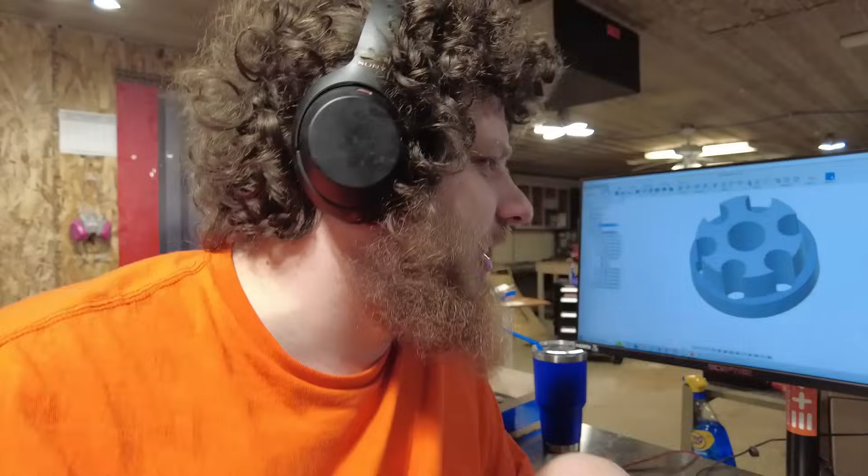The part is actually pretty simple as long as we can make it without breaking these tiny drills. Now, unfortunately, I can't show you this part, but what I did is the same thing I did last time. I designed a part that kind of looks like the part, but is completely different in all aspects and features, with the exception of the hole sizes on this one. So I'll be able to show you making this part, which I'll use as kind of a setup part.

As long as we can get the holes drilled, the rest of it will be easy. So the setup part will help me get there. But I get to show you the whole process this way instead of having to blur the picture of the part or something lame like that.

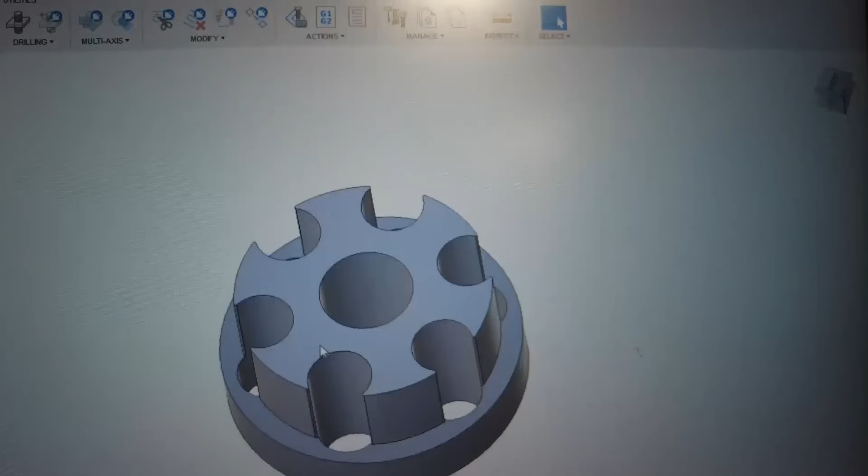Speaking of which, this is our part. Now, there are a bunch of holes that I'm drilling. I'm drilling 0.2 millimeter holes and then 0.3 millimeter holes.

We have this nice little step here, and I have conveniently made the outside diameter 1 millimeter and the height of this 0.5 millimeter. The actual part is just slightly bigger than that, but for dialing in tool wear offsets to get the diameter and height dead nuts, it's easier to do it with round numbers. So for a setup part, I might as well use the round numbers.

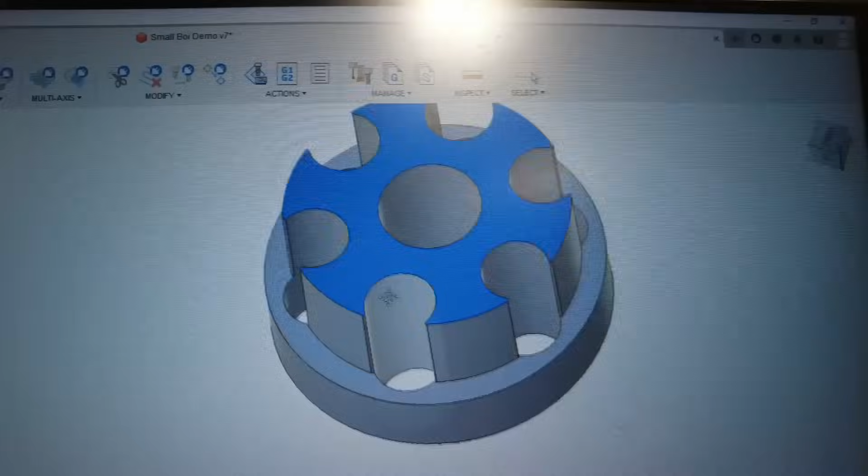This will be a one operation part. We're going to start by facing off the whole stick of material and then spot drilling our holes. Then we will be drilling our holes, first the 0.2 millimeter, then the 0.3 millimeter.

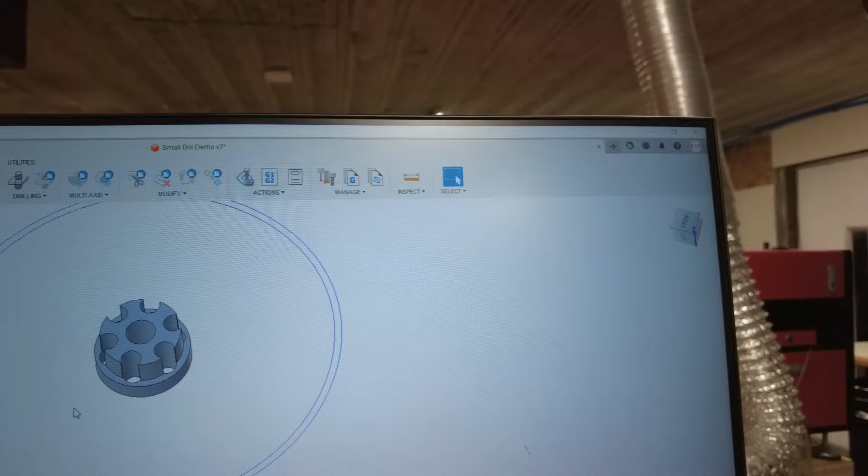Then we'll be doing some adaptive clearing with a 1/8 inch end mill, and then profiling the top ring here, and then profiling the bottom ring. Lastly, we will be using a slitting saw to part this off. We'll tab it off, and then I will just use some sandpaper to get rid of the tab on the bottom.

We do have some tight tolerances we need to hold on this. The outside diameter is plus or minus 1 thou, in addition to the height and that little step height. So definitely the kind of part you want to be making at 2 a.m., which is, I have a feeling, how this project is going to end.

In the last video, we made my smallest ever part, and then immediately made a new part that was my smallest ever part. This part will again be my smallest ever part. So I have 3 parts in a row running that have set records for my smallest part.

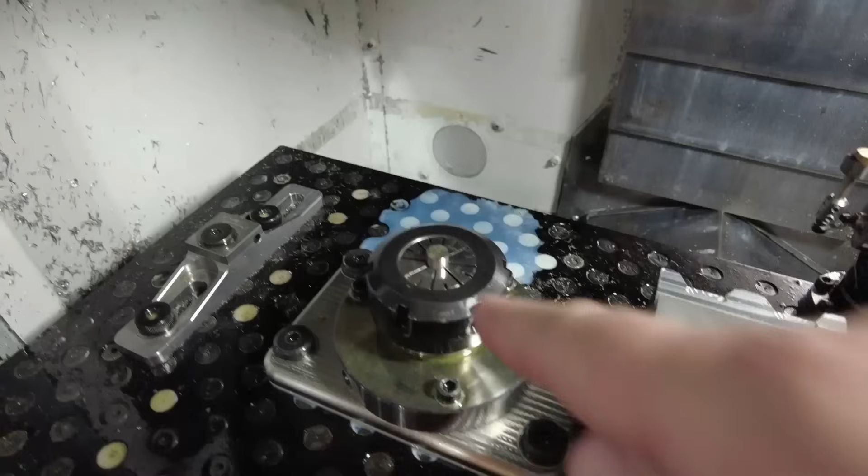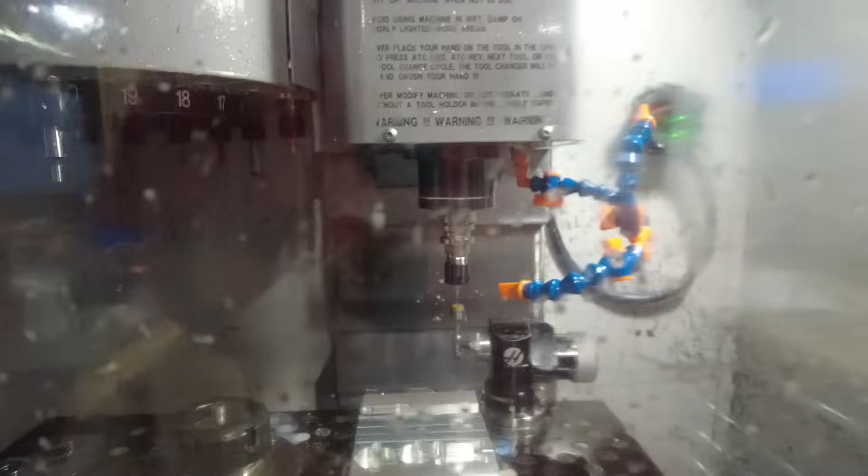Now, out of sheer luck, we get to use the same setup and even the same material as those last parts. So all I have to do is move this up and reset my work coordinate system. I only needed to set the 2 drill bits to be able to run this part. Everything else uses core tools, which is convenient.

And we're pretty much ready to press cycle start. I have a feeling this is either going to be a very short project or a very long one.

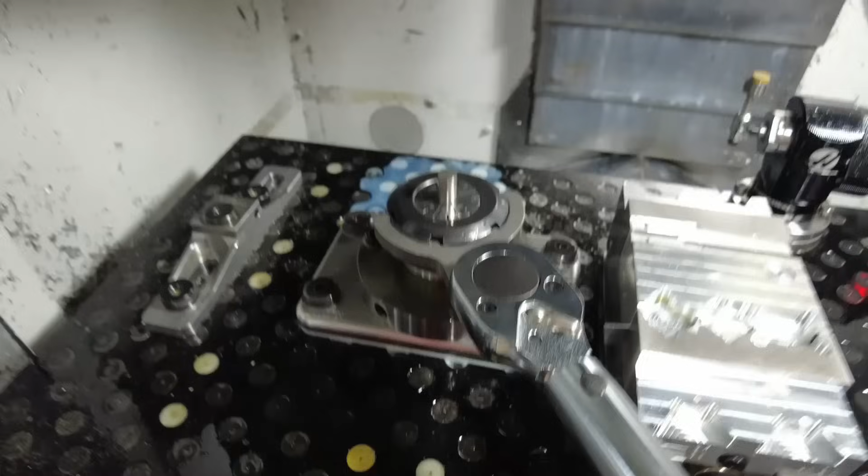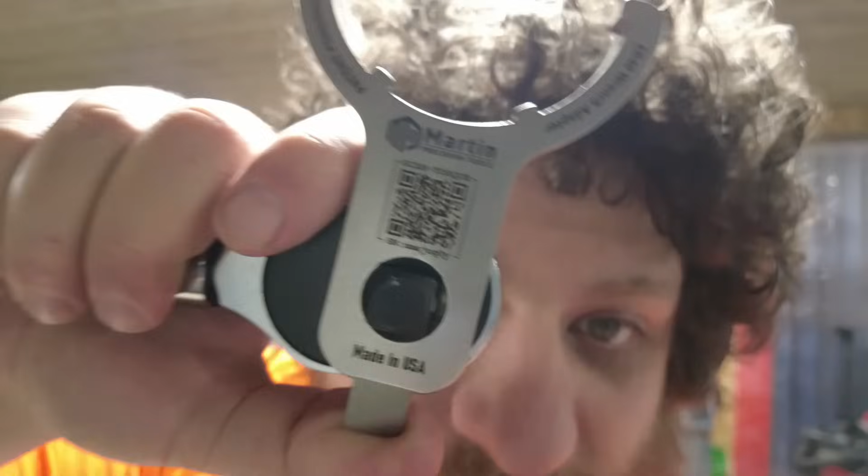I always get a bunch of questions about it. This torque wrench adapter is from Martin Precision Tools. And yes, I know that with normal torque wrench adapters, you're supposed to do them at 90 degrees because it helps with the math or something. But this one has a little QR code on it. You scan that QR code, type in your torque numbers and some information about your wrench, and it converts the torque values for you to account for the added length of the wrench. So stop whining. Wow, that came out really Hoosier.

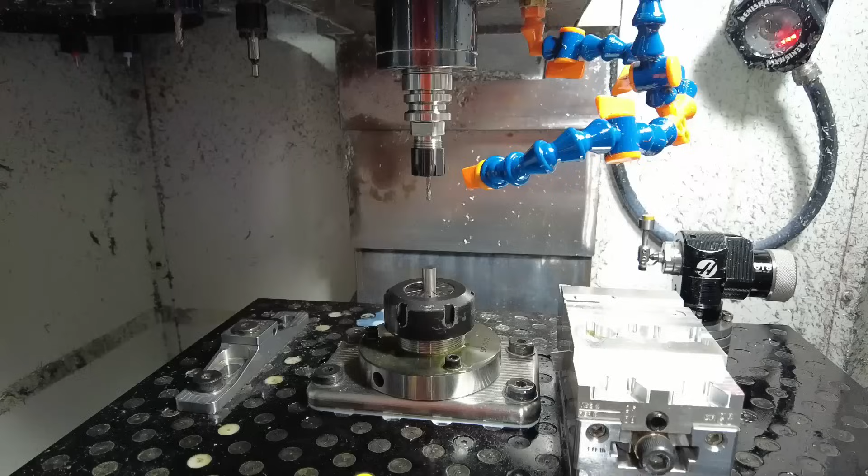So again, we will be using the end mill to set our work offset height. I'm just gonna jog down close, move into tenths mode, and wiggle this 2 thou shim until I feel it start to drag.

The work coordinate system here really isn't that important. It doesn't need to be that precise. The material is so much smaller than the part is so much smaller than the material that we could be off by like 1/8 of an inch and it would still work.

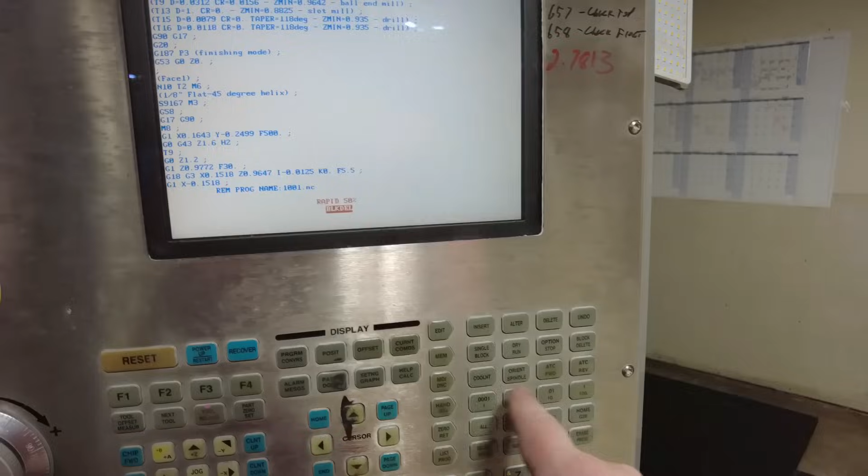And of course, single block, 5% rapids, feed rate down at, I don't know, 30%, 20%, and option stop. Now we should be able to run this.

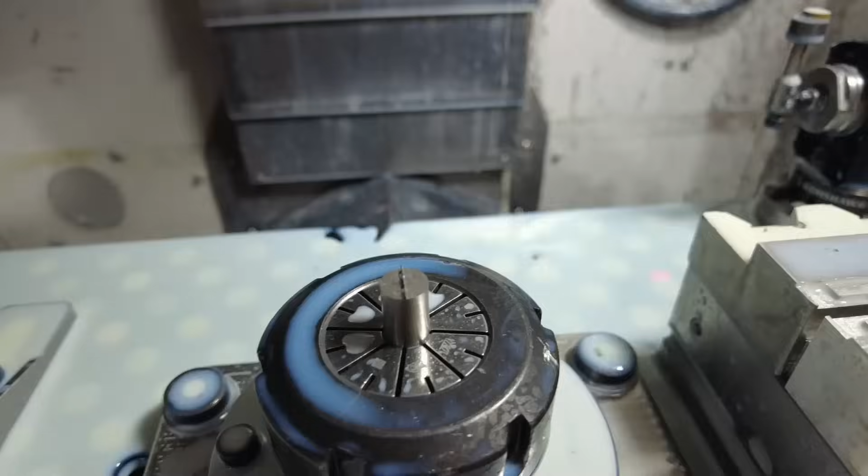So I knew how small this part was in CAD, but CAD did not do it justice. Holy crap, that thing is tiny. I'm gonna lose so many of these.

So for context, that is Abraham Lincoln on a penny sniffing my part. I did not understand how small this part was. I knew the numbers, but I did not understand.

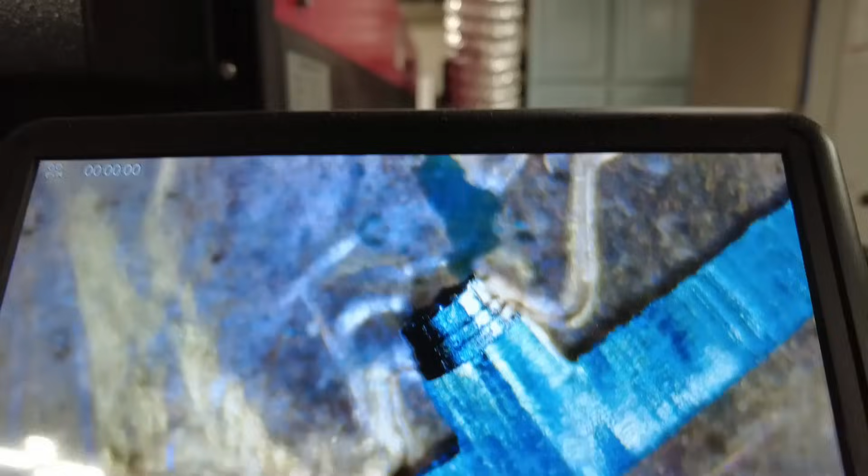Anyway, some of our geometry appears to be there, but most of it is really ugly. It looks like our end mill is in bad shape, and there's like 3 stair steps when there's not supposed to be. And then also there's some burrs on the top that we'll need to get rid of.

I started working on getting that tab off the backside, and then I dropped it. So we need to make another one.

But I'm gonna replace that 1/8 inch end mill that I used for the outside with a brand new one. When you use your naked eyeball, this end mill looks brand new. But you can see under magnification there's just a teeny tiny chip in the corner, and that was enough to ruin that part.

I think what I'm actually gonna do is put another copy of this end mill in the machine, and I'm gonna have a rougher and a finisher. We're gonna rough with this end mill, and then come back with a brand new finisher that's only going to do the profiles. All right, let's try this again.

This time I'm using a roughing tool and a finishing tool. I've also added some more deburring. So hopefully this one goes a little bit better, and hopefully we don't lose the part this time.

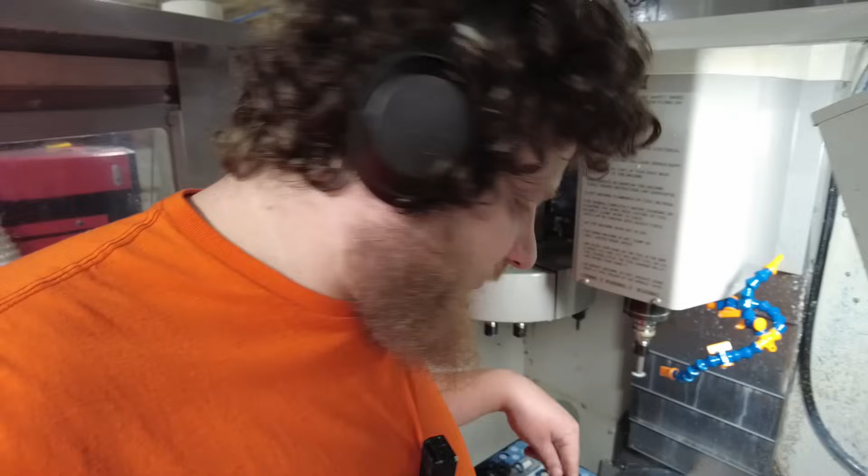And we have a new problem. So I tried to make the tab a little bit smaller so it'd be easier to remove, and the part's gone. So I made the tab too small, and it's somewhere in the machine, and there's no way I'm ever finding that part. So we get to make another one.

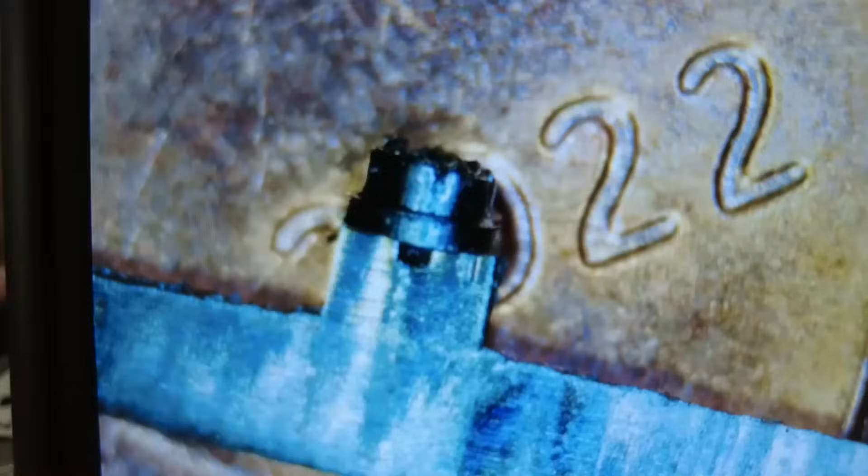This one is definitely looking better. It's not perfect, but it's better. I think the big issue is the part's supposed to have some open pockets here, and I think burrs are getting pushed into them. They're supposed to look like this here, but it looks like this.

I'm also not sure that extra deburring I did any good, but I want to at least measure this and see if we're in the right ballpark.

I dropped it again. I was trying to put it under the microscope at a different angle with these needle noses, and it went flying. So let's make another one.

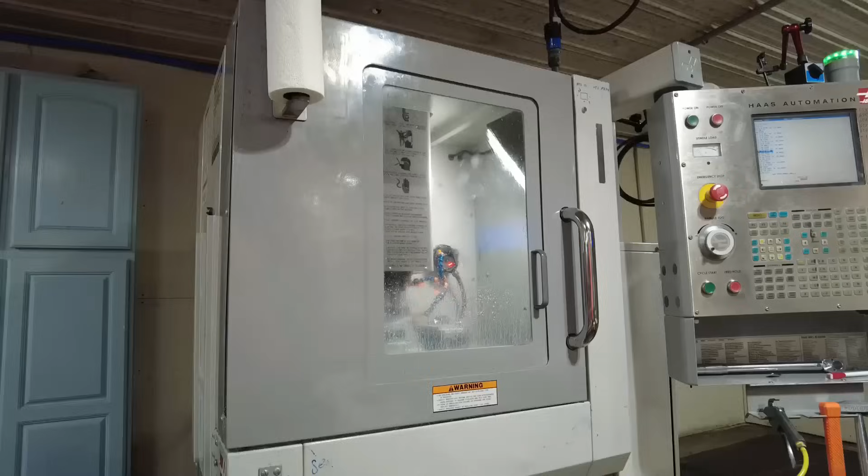It's about 1:20 a.m. right now. I am not having a lot of luck with these parts. I'm getting a part, like I have something to hold. Sort of. It's small, so you can't really hold it, but I have something to put under my microscope.

But it is coming out so ugly that I would not send it to a customer. It's all... you're gonna have a hard time seeing it on camera here, but it's all like wrinkly and stuff.

I've tried a couple different ways of finishing the outside. This one was a bore tool path. My last one was just a normal 2D contour. 2D contour worked better than the bore tool path.

But we're not improving, and I need to be improving on these parts. So, I don't know. I'm considering going to bed because I'm just hitting my head against a wall. I might think of something better in the morning.

I'll try one more tonight, and then if we're not making progress, I'll go to bed and hope I get a sudden revelation tomorrow. Yeah, here's a better angle. You can see that at the holes, it's not really cutting.

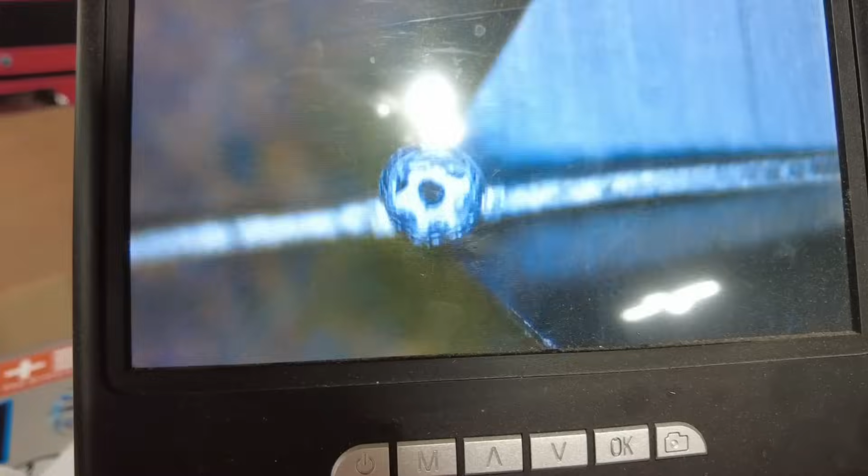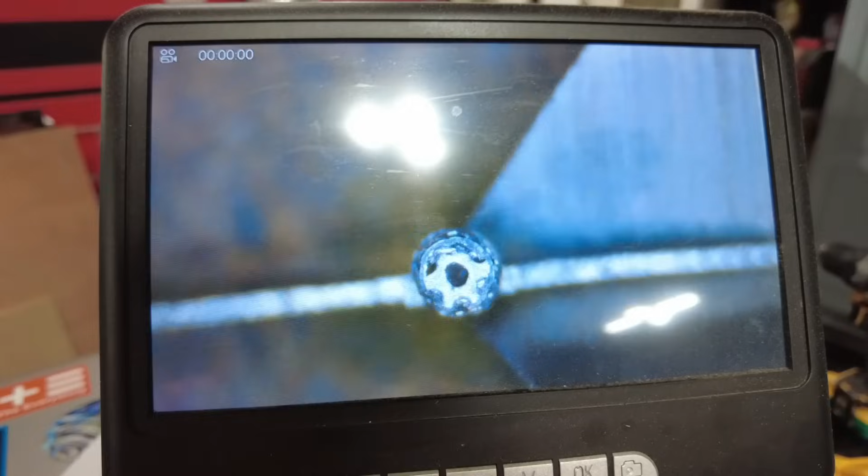I'm sorry, I know that's a little wiggly, but it's hard to hold this steady at this scale. So it's not cutting, it's kind of tearing and grinding the material aside. Basically, I think the whole part is becoming a burr.

Maybe speeds and feeds on that finishing end mill. Maybe I need to go faster. Maybe I'm rubbing. I'm gonna try that.

We are now at 3:35 a.m. So I've been at this a few hours now, and I'm tired. I'm getting closer though. We're getting closer to a good part.

Now, I did change to making the actual part, not my fake part that I designed. My part was actually a little bit smaller because I rounded down to a millimeter to make it easier to measure. But I realized that I rounded down like 0.1 millimeters.

I was like, oh, that's nothing, that's not going to make a difference. Well, first rule of small parts is don't lose track of scale. That's still 10% smaller. Well, 10% bigger.

So making that switch has helped. I've played a bunch with speeds and feeds and tool paths, just tiny tweaks at a time, and we're getting closer. I'm running into two issues now.

One is the holes still want to wander, and two, they want to have burrs in them. So I'm about to try another solution to fix the wandering. I'm going to use a bigger drill bit to spot drill them first, and then go in and drill the actual hole. I didn't have any sort of spot drill small enough for this, so I was using a ball mill to make a tiny point, a 1/32 inch ball mill. But I think that ball mill is too large of a radius, as crazy as that sounds, and it was still letting the drills wander.

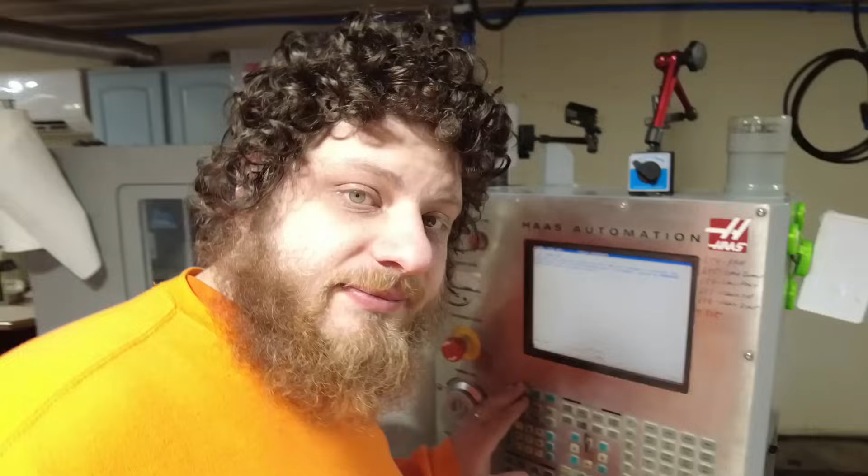The advantage of doing it in soft jaws is I can use the little handles that are left on the machine, basically the tabs that are bigger than the part itself. I can use that to load it, and then when I'm ready to unload it, I can just use a pair of tweezers.

So while I warm up the machine here, I am going to start work on designing those soft jaws and getting that programmed. And then while I'm doing some tests with that, I'm going to start trying to make a jig to see if I can sand off the tab.

Okay, we are on to something. I got most of the way there on that last part. It ended up being a little bit out of tolerance in terms of flatness, but that's just a skill issue and something I can fix with a little bit of practice.

I have a couple hours to get these done. I only need 10 of them, and they only take 3 minutes to machine. So even if I screw up half of them, we're fine.

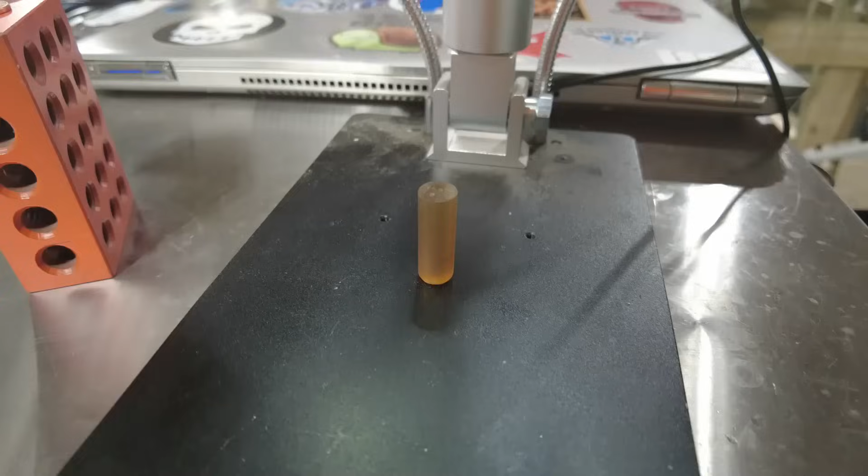This right here is my jig. If we look under the microscope, you can see basically just at the end of the piece of plastic here, I have drilled a teeny tiny hole. That hole lets me take the part when it comes off the mill.

It has that little tab on there, so I'm able to use that tab as a handle, push it into that hole, and then use some flush cutters to cut off the tab, where I can then bring the part to its final size on some sandpaper.

I have this lapping setup here with some good high quality fine grit sandpaper on a nice glass sheet. It gives me a very flat area to work with, and by just taking that part and, very gently and very carefully sanding off that tab, we can get a finished backside.

And then I get to move to the very tedious task of measuring each part. It's doable. It just takes a lot of attention to detail and looking through that little magnifier thing I have and using tweezers to manipulate the part. It's not easy, but it's doable.

We're still making more progress, but I'm having a hard time getting my parallelism tolerance between the top and the bottom of the pieces, which makes sense because I'm doing it by hand. I just don't have that fine muscle control needed to hit such a tight tolerance. So I'm going to make a jig. That's my new plan. I'm going to run off the rest of these, make a bunch extra, like 20, even though I only need to ship 10. Then I'm going to make a jig to help me sand the backside. We are officially making progress.

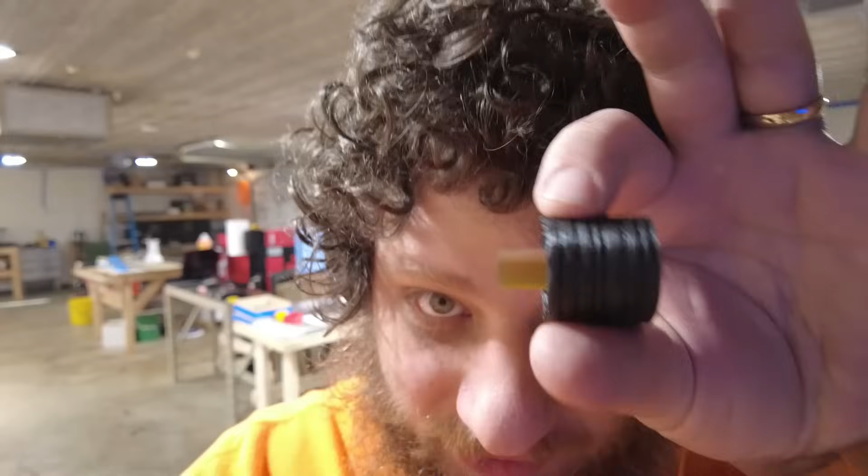I was going to machine it, but then I realized I have a 3D printer. So I have a piece of Ultem that can slide back and forth in there, and then it's just a 3D printed ring. What I do is load the part into that piece of Ultem and then put this against the sandpaper and push down on the ring. That both sets the part into its little cavity, and also the ring levels everything out. From there, it just takes 1 or 2 very gentle slides on the lapping paper, the sandpaper, and that gets rid of the tab, and then I can measure it.

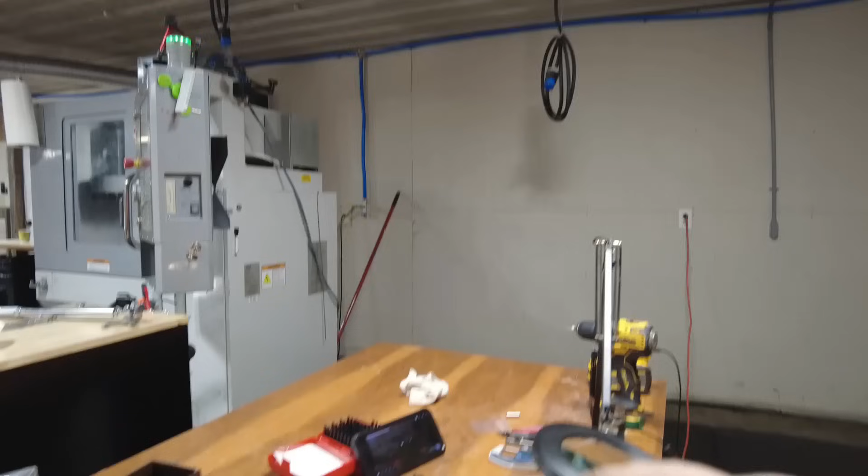Measuring is definitely the hard part because I have a tendency to lose the parts. Or in this case, I have lost my 0.3 millimeter gauge pin. It could be on the table, it could be on the floor, it could be stuck to my shirt. I don't know. I think the lesson learned here is that if I'm going to be working on parts like this all the time, I need a very organized, neat work area with lots of little containers to put things in.

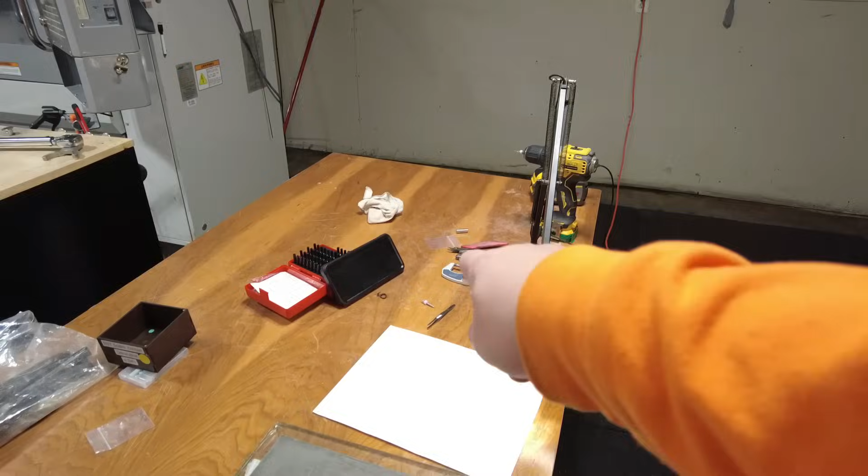I need to have my tools in a more organized holding device, some sort of desktop organizer, because I tend to lose things when I am grabbing tools. So next time I have a job like this come in, I'm going to invest greatly in my desk setup.

I have found my gauge pin. I think it's exactly where I set it, which was near the corner of my drawing here. I turned over my drawing so you guys couldn't see it. There are just some scratches, and this little gauge pin just happens to look like those scratches.

Okay, back to inspecting these. The tale of the tiny parts continues. This is day 2 of the tiny parts. I got the ones made out of stainless a couple days ago. A weekend happened in between.

And now I need to finish up this order with the mild steel ones. So it's exactly the same part. Technically it was a separate order with a different due date. So I already shipped the stainless ones, and the mild steel ones will go this afternoon. I'm running the first one right now. I don't expect it to be any different than the stainless one. I see no reason why I can't just use the exact same program, hit go, and get good parts. So as soon as this first one comes off the mill, I'll check it and find out.

But this should be a fairly easy day without too much drama. Famous last words. Though on the opposite side of things, this piece of plastic came in today. That's about $1,000 worth of Delrin. There's like 4 different jobs coming out of that big piece and like 35 or 36 different parts. Honestly, I would much prefer to have this already cut up for me, but as I was looking around at prices, this was the only economical way, and Delrin cuts easy enough on a table saw.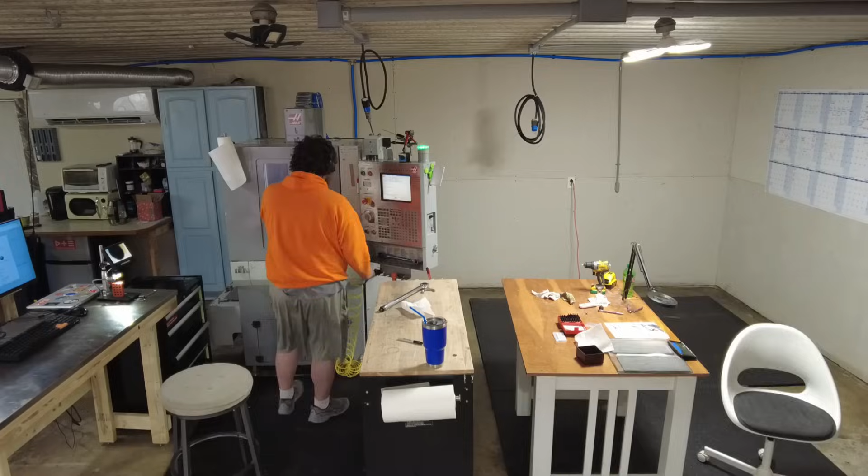I have a confession for you guys. It's been like 3 weeks since I recorded the last segment of this video. A lot has happened. Basically, the job immediately after the one that I just showed, I got behind on, and that kind of snowballed into me being right at the deadline for every other job that I was doing.

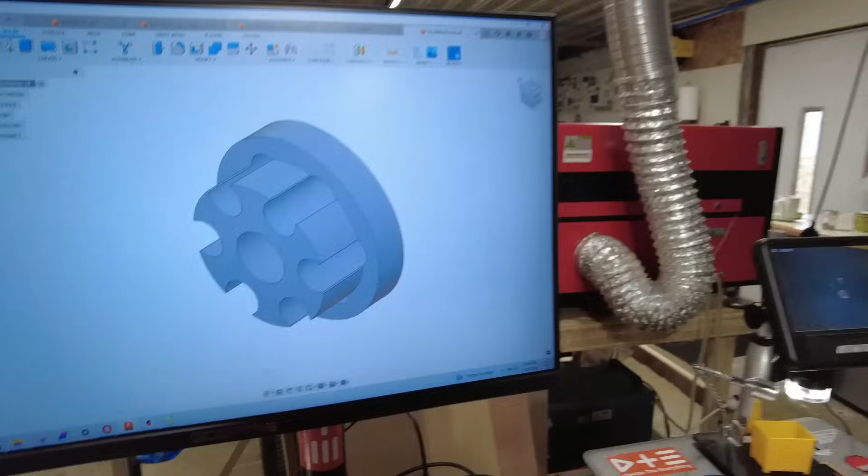So I have one more job that I'm working on today. It's due tomorrow, and it requires a whole bunch of material removal, but is otherwise a fairly simple part. So I'm probably not going to show that one because I want to just get moving on it, but I wanted to go ahead and wrap up this video so I could get it published. I learned a lot of things in the process of making this part. Basically, the problem I was running into during production was burrs.

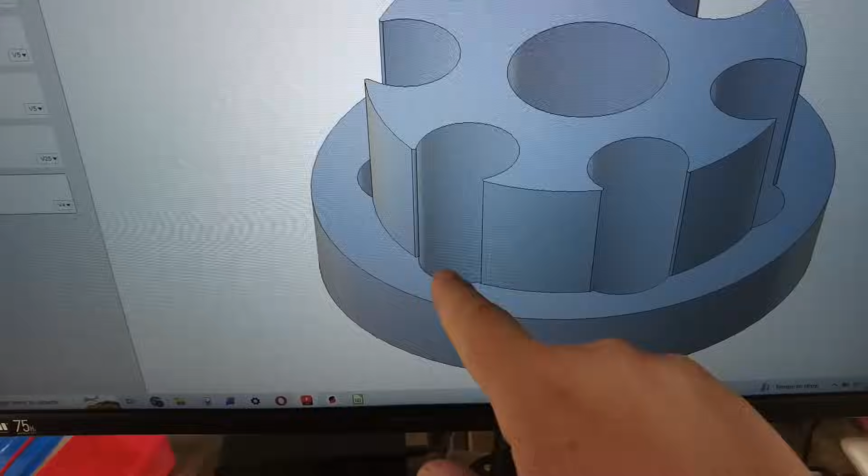Burrs were my big issue, because this part is very small, so even a small burr causes a big problem. The burrs were coming from this hole right here, or these holes going around. This isn't actually the customer part, but it has some similarities, this hole being one of them. So I ended up doing a couple things.

The first thing, and I kept relearning this lesson during the course of this part, is sharp tooling. Every time I switched to a new tool, things came out better. I also used some of my tolerance allowance to put a larger fillet here, which gave it a little more strength. We're just talking a couple thou, but a couple thou made a big difference.

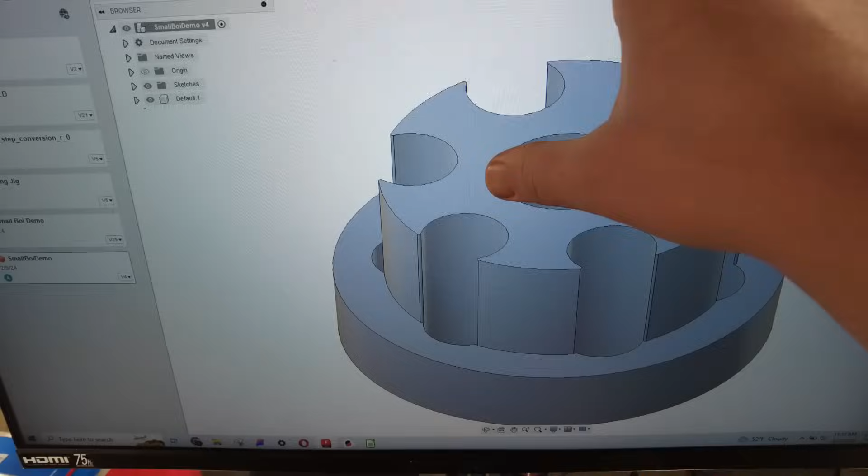I tried several variations of how to do this hole. I did not have an end mill small enough to get in here and deburr it, so it basically had to come out right the first time. What I ended up doing was something I've never found a reason to do in my machining career: a conventional finishing pass around this. I would start with traditional climb cutting, go around once, then do the final finishing pass with conventional, then come back and climb cut again. That would move the burr one way, then the other, and then it would come off. That's how I was eventually able to get this fairly burr free.

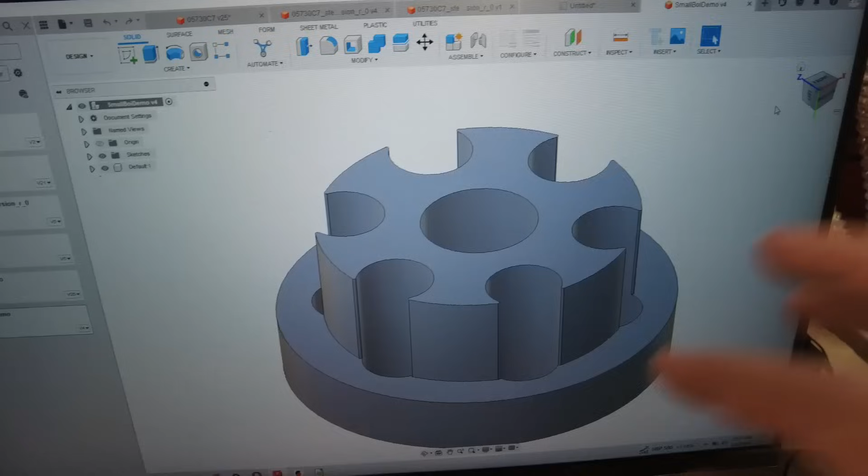After doing that, I was able to use a gauge pin to push any other burrs through, and then I sanded off the bottom. So, push the burrs through and then sand them off. That also worked here in the center hole.

The other problem I had was the darn parts would go flying, constantly, all the time. I lost so many of these parts. I did get out this little magnifier lamp that has a ring light underneath it, which helped immensely for doing the tedious tasks like deburring and measuring.

Inspection was another hard part, again mostly due to just handling the parts. I ended up grabbing some of my wife's tweezers, taking them to my belt grinder and sharpening them, which gave me a good way to hold the parts.

When they come off of the machine, let me grab one here, they are on this nice long tab left over from using the slitting saw. So I'm able to grab the parts by that tab, and I had this tool I used to sand off the tab on the bottom. I would insert this... actually I did do that a couple times. So put it into my sanding jig, there we go. Then I can use my side cutters, which I ground to be even more flush.